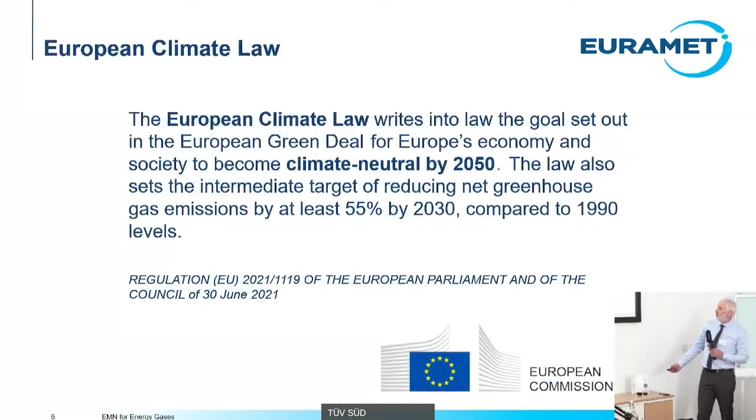Okay, so you'll all be familiar with statements like these. This is the European climate law, which puts into law their targets for carbon emission reduction to be climate neutral by 2050, and that's pretty much in line with where the UK is aiming for as well.

So the question then becomes, how can metrology support this energy transition? There's a lot of challenges. Chris mentioned some of them there, looking at reliable measurement to deal with these new gases within transport, distribution, storage, etc. So there's a coordinated effort across Europe to try and meet the needs of the stakeholders and look at the best ways to deal with those metrological issues and move them on into standardisation.

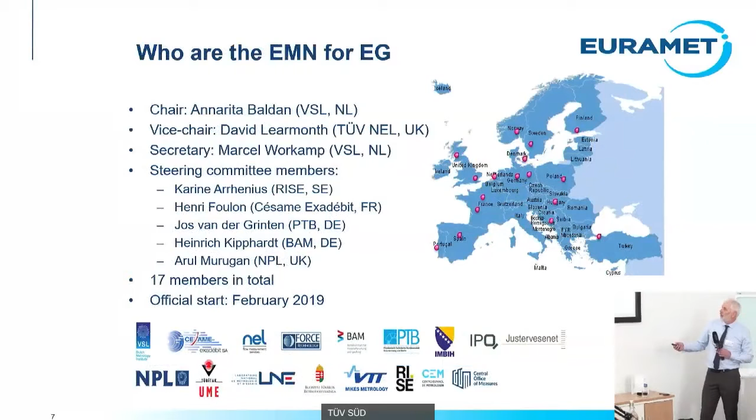Okay, so who are the EMN for Energy Gases? Well, it's a network of NMIs across Europe, and you can see we've got good coverage in all the main countries across Europe. It says 17 members there, but we've just taken on board another member, the Italian INRIM, the Italian Metrology Institute has joined us as well. So we're well represented with all the NMIs across Europe.

So what is the scope? It's really becoming a centre for energy gases. It's funded through EURAMET, which is a European Metrology Institute organisation, with a focus on energy gases, renewable gases, and also looking at measurement services across Europe for gas flow, gas composition, temperature, density, etc.

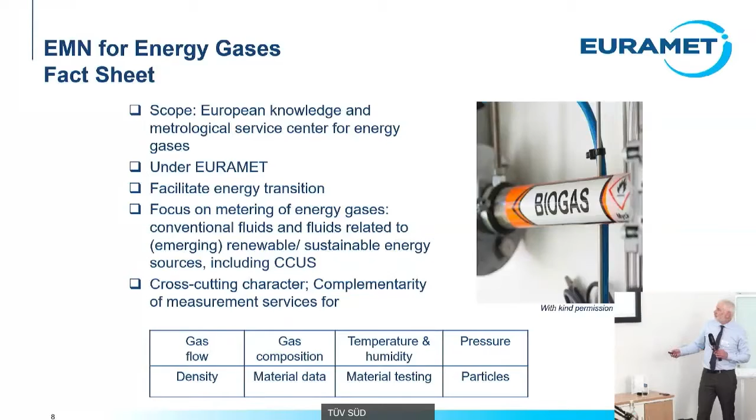Okay, so the EMN for energy gases started in 2019. We've had a few milestones since then. We've had a number of workshops, engaging with stakeholders to understand what their requirements are. We engage with the European Parliament to feed back to them where the gaps in metrology are and the gaps in standardisation. And we've just recently launched a website. Just to say about the website, if you wanted to find out a bit more, there's information about the different gases and the different projects that are happening across Europe within these areas. There's information, there's a newsletter, and there's information about workshops, etc., if people want to get involved.

So for our objectives, we're looking to engage with stakeholders and disseminate information from the various European research projects. There's a few here which the colleague might mention in their discussion. So there's things like decarbonising the gas grid, working on hydrogen vehicles, work on biogas, biomethane, and also some work on natural gas to try and make it more environmentally friendly.

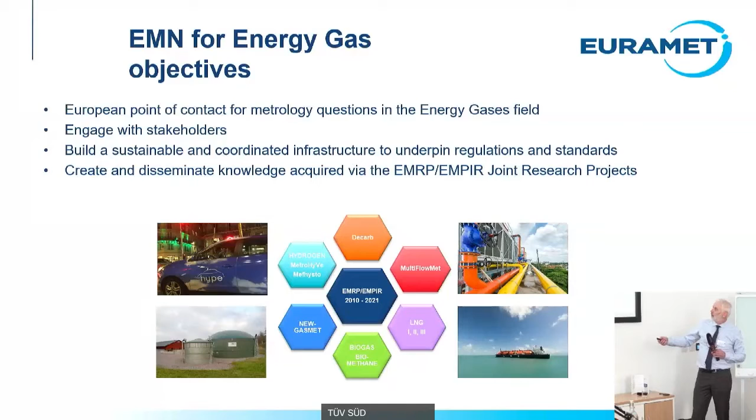So we've also developed a strategic research agenda. EURAMET had asked us to develop a strategic research agenda to help direct and focus any research that they're funding. So we were instrumental in putting that document together, and I think it's just recently been updated, but if anyone wants to see it, there's a copy on the website. You can download a copy on the website.

And also we're looking to maximise the impact of the research, so you can find out the outputs from the research. Again, the website's probably the best place to get that information.

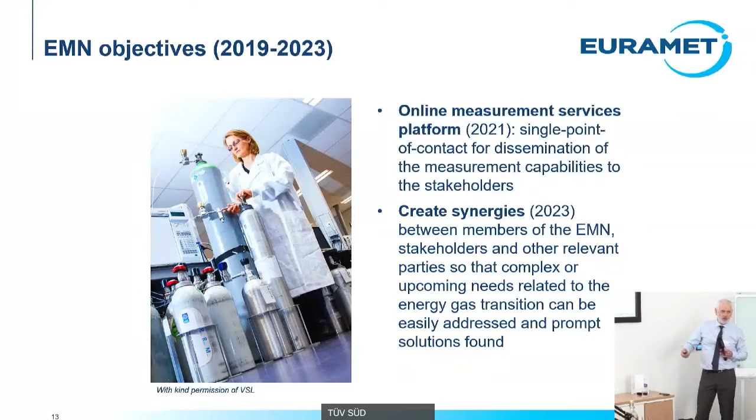We're also developing an online measurement services platform, since not every country has all the facilities required to carry out the necessary research. There'll be an online platform coming at the end of this year to let everyone know what the various NMIs have by way of services and test facilities, to bring closer working between the various NMIs across Europe and have a joined up approach to research.

So that's really about it. If you want to find out more, if you want to get involved in shaping future research on energy gases, if you want to find out where services across Europe might be available, have a look at the website - hopefully you'll find what you're looking for there - or you can email direct to our chair.

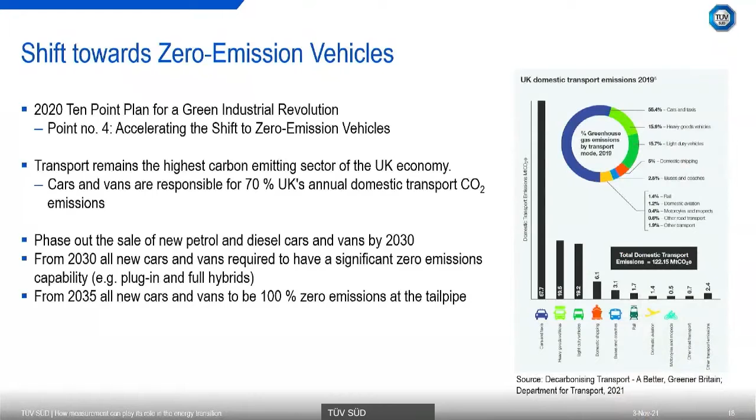So the government is looking at passing a mandate soon, which looks at phasing out the sale of new petrol and diesel cars and vans by 2030, followed by, from 2030 onwards, cars and vans having significantly zero emission capability, and by 2035 onwards, all cars and vans to be 100% zero emissions at the tailpipe.

There are two ways of achieving this: one is to use battery-powered electric vehicles, and the other is to have hydrogen-powered fuel cell electric vehicles, both of which produce zero harmful emissions at the tailpipe.

The problem is that there are certain circumstances where battery-powered electric vehicles are not suitable, due to, for example, the limited range of the vehicle, as well as the significantly long charging times for battery electric vehicles.

This is where fuel cell electric vehicles can play a key role, because filling up a car with hydrogen is similar to filling up a car with petrol or diesel. Within 5 minutes, you can fill up a car with hydrogen and have about 400 miles of range.

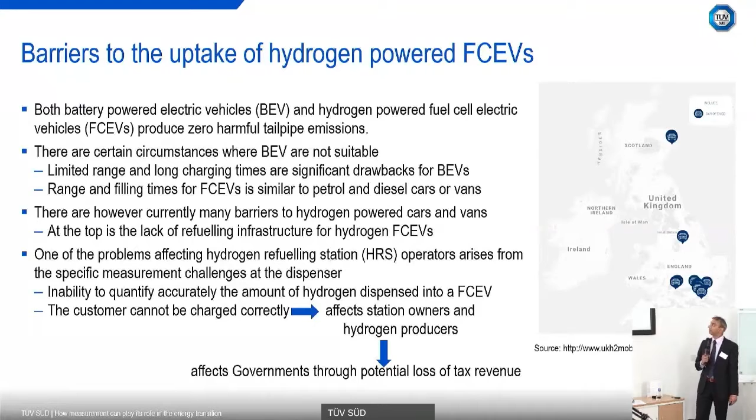However, as Sonia mentioned, James May showed in his YouTube video that he's got the latest Toyota Mirai car, which has a good range, but there is a big limiting factor: the UK, as shown on this slide, does not have a refilling infrastructure for hydrogen refilling stations.

Part of that is due to the significant barriers that are in place for dispensers to be installed. One of the barriers is that it's not possible to accurately measure or quantify to a sufficient degree of accuracy the amount of hydrogen that is dispensed from the refueling station. If you can't quantify the amount of hydrogen dispensed, then the customer can't be charged correctly, which has a knock-on effect on the station owners, the hydrogen producers, and ultimately the UK government, because the government can't charge the correct amount of tax.

This image shows that the UK at the moment has less than a dozen refueling stations for cars. You've got 2 in Aberdeen, and that's all you've got in Scotland, for example.

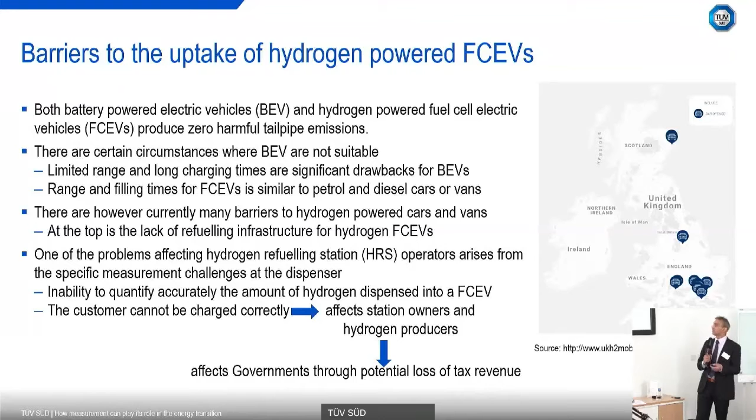There's been a lot of research into how to safely refuel a hydrogen fuel cell electric vehicle. Most of the systems in place for refueling stations are based on either SAE standards, CSA, or ISO standards.

Hydrogen is stored on board the fuel cell electric vehicle in what's called a compressed hydrogen storage system, where you've got hydrogen tanks, the required tubing, on-tank valves, and so on, which ensures a safe system for storing hydrogen.

One concern when filling up the car with hydrogen is the heat of compression effect, which causes the tank temperature to increase, and there are systems in place which minimize that. Hydrogen refilling dispensers follow what's called the SAE J2601 protocol, which minimizes the tank temperature so that it's below the maximum temperature limit.

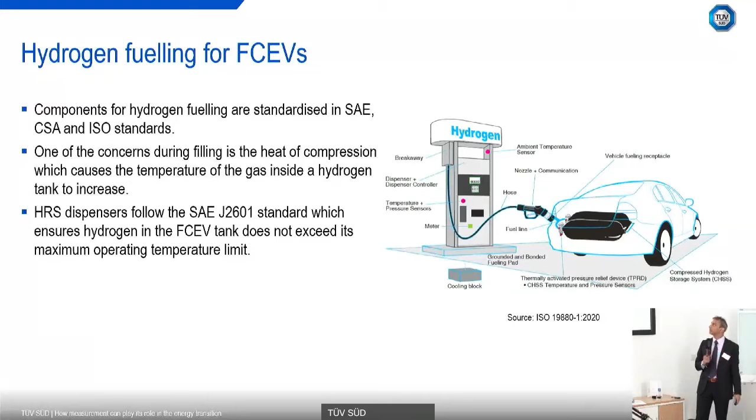The accuracy for the dispensers that dispense hydrogen is specified according to the OIML R139 standard. Based on this standard, the maximum permissible error is 1.5% for the measuring system, that is the flow meter, and for the complete system it is up to 2%.

The problem is that it's quite difficult to achieve these targets because the hydrogen supplied can vary significantly in pressure up to about 875 bar. Also, because you want to minimize the temperature increase in the tank while pumping up to 700 bar, hydrogen needs to be pre-cooled to minus 40 degrees C.

Based on these large varying conditions in terms of pressure and temperature, Coriolis meters have become the preferred choice for dispensers. There are two common locations: one is upstream of the pre-cooler, and the other is downstream of the pre-cooler, in the dispenser itself. There are advantages and disadvantages to each. Installing the flow meter upstream of the pre-cooler means you are measuring hydrogen at near ambient temperature.

Okay, so it's quite good for the Coriolis flow meter. However, because you've got a large dead volume downstream of the flow meter, you have measured that amount of hydrogen, but that amount hasn't actually been delivered to the car. So you have uncertainties in the flow measurement itself, or rather in the amount dispensed to the car.

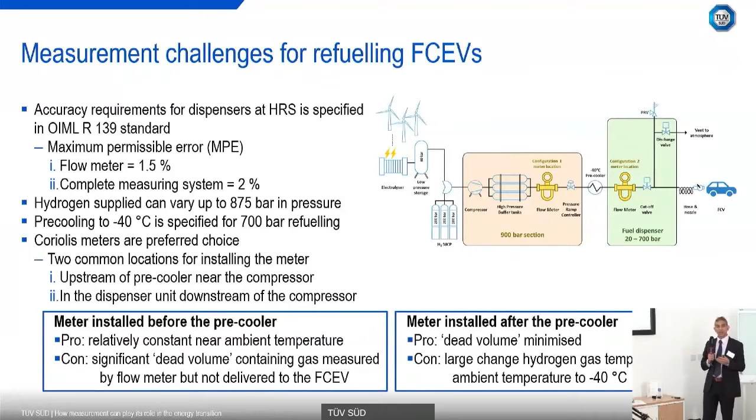So one way of overcoming that is to install the flow meter downstream of the pre-cooler, where you're minimizing the dead volume. The only issue with this is that the flow meter initially sees hydrogen at ambient temperature, and then the temperature drops significantly to minus 40 degrees C. This large change in temperature can affect the flow meter's accuracy.

So based on these questions, EMPIR project MetroHyVe 1 was started to look at addressing some of these questions. And what has happened recently is that we've just begun the MetroHyVe 2 project earlier this year, which looks at the learnings from MetroHyVe 1 and continues to help solve some of these issues.

So one of the aims of the MetroHyVe 2 project is to develop a metrologically traceable framework for testing hydrogen dispensers. As part of this, the different measurement institutes taking part in this project are looking at having intercomparison tests, where all the institutes take their field test standards to a single refueling station and carry out an intercomparison test.

So TÜV SÜD National Engineering Laboratory is participating in this MetroHyVe 2 project, and the funding for building the hydrogen field test standard was provided by BEIS.

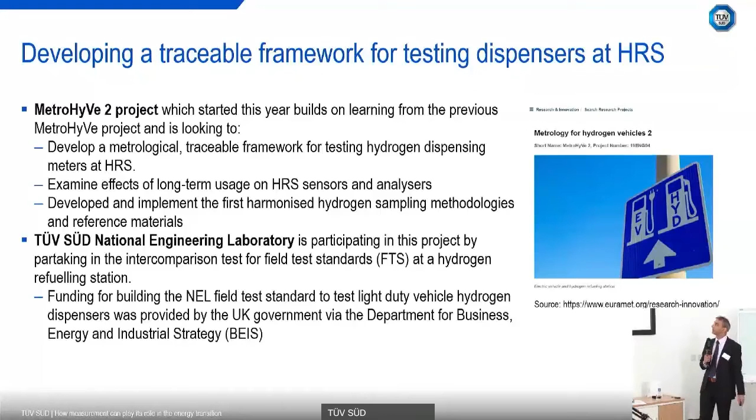Right, we shall look at now how we've gone about designing and building the NEL hydrogen field test standard for light-duty vehicles. The design basis for this field test standard was that it needs to be suitable to accurately measure the amount of hydrogen dispensed from the refueling station with respect to the OIML R139 requirements.

So the field test standard that we have built is based on the experience other NMIs have gained during the construction and testing of their field test standards. It is a gravimetric system that we have built, and it has a hydrogen capacity similar to a fuel cell electric vehicle.

So basically, we can fill the hydrogen field test standard using H70 dispensers and fill it up to 700 bar, according to the SAE J2601 protocol. The mass of hydrogen collected is around 4 to 6 kilograms, and the uncertainty of this measurement is about 0.3% at 95% confidence.

Now, as you may know, hydrogen has some concerns with regards to safety. So because of that, we've done a number of safety studies to make sure the system is safe to use. The first was to conduct a hazard and operability study at the design phase. Then we went on to look at the hazard area classification study and an explosion protection document to make sure the system was safe to use.

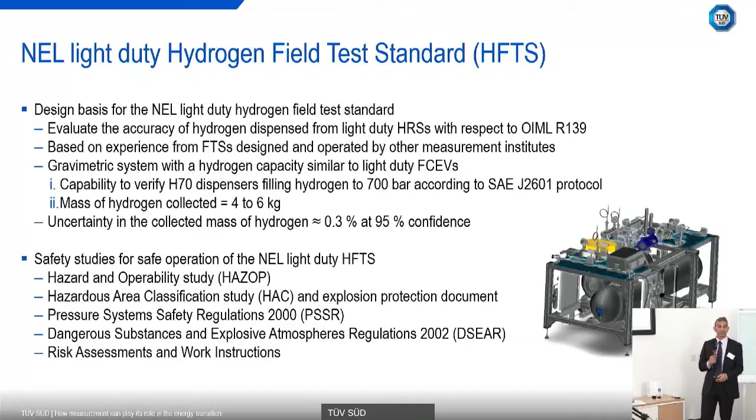Now, because we're dealing with a system up to 700 bar in pressure, we have to also meet the requirements set by the pressure system safety regulations. Since hydrogen is a flammable gas, we've also got to meet the requirements set by the DSEAR regulations. In addition, we've undertaken risk assessment and prepared work instructions on how to operate the test rig.

So how we would carry out the test is that the field test standard is transported in the rear of a van to a hydrogen refueling station. The van parks next to the dispenser, similar to what you would do if a fuel cell electric vehicle parks for refueling, and you connect the dispenser straight onto the field test standard.

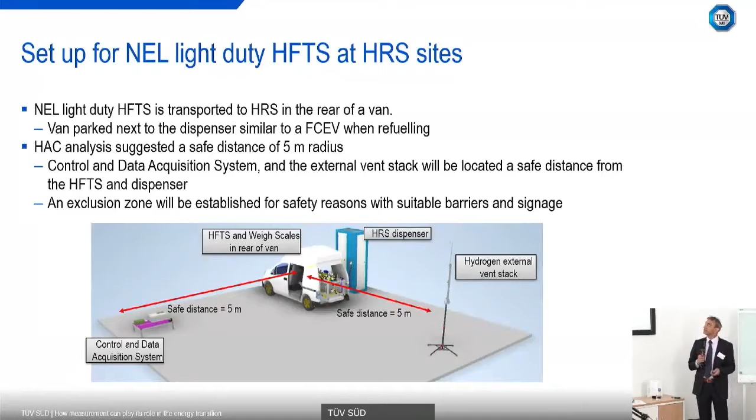The hazard area classification study had shown that you need a 5-meter safe distance for any piece of kit that is not ATEX certified, such as the vent stack, which will be 5 meters away from the field test standard. We are also looking at establishing an exclusion zone for safety reasons with suitable barriers and signage.

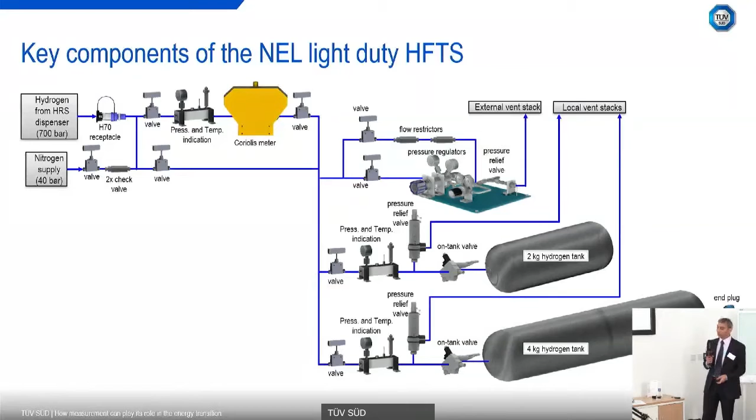As I mentioned previously, the light-duty hydrogen field test standard is a gravimetric system. The reason why we have gone with gravimetric is that what you've got to bear in mind is that when you fill a car with petrol or diesel, you're measuring the amount of fuel dispensed in liters. Hydrogen being a gas, you need to use kilograms instead.

So we are going to compare the kilograms of hydrogen that's dispensed as indicated by the dispenser against what we measured by the field test standard, which as I mentioned, is looking at the difference in mass before and after filling.

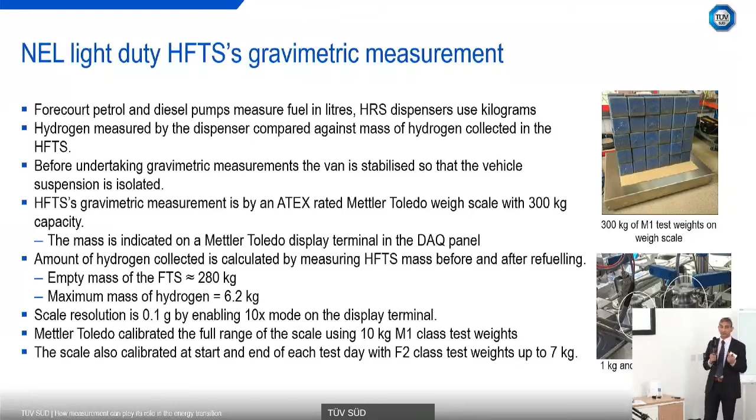The scale resolution has been enabled by using 10x mode, giving you a 0.1 gram resolution on the scale. Mettler Toledo calibrated our scale for its maximum 300 kilogram span using 10 kilogram M1 class weights. We also calibrate the scale before testing at a refueling station by using F2 class weights up to 7 kilograms, covering the full span we're going to be using in terms of filling the tanks with 6.2 kilograms of hydrogen.

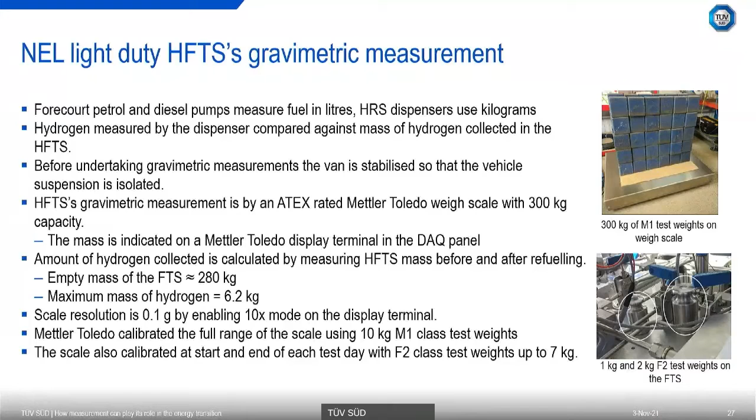Now what you've got to bear in mind is that the hydrogen tanks we're using are the same tanks that are in a fuel cell electric vehicle, and those tanks are what's called a type 4 hydrogen tank. They can expand slightly because of the 700 bar pressure. So because you're using a gravimetric system, you've got to take into account the effect of buoyancy because the tanks are expanding slightly.

As a result, we've got ATEX rated temperature, humidity, and ambient pressure sensors that are able to measure the ambient conditions around the tanks, and thereby calculate the air density, which is used to make corrections for buoyancy. Also, what we've got is a nitrogen panel that is installed next to the field test standard, as shown on the bottom right image.

The reason for the nitrogen panel is that after you finish testing, you need to purge the tanks from hydrogen so that you've got basically less than 4% hydrogen in the tank. This is so it's safe to transport the field test standard back to our site, as well as you've got to maintain about 20 bar or more in the tanks, because the tank cycle life gets affected if the pressure decreases below 20 bar.

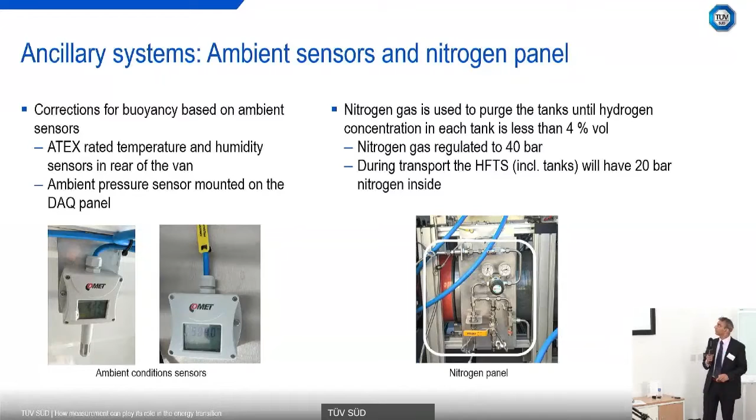We shall now look at the planned verification test for the gravimetric system.

So it's important that we verify the field test standard before it is taken to hydrogen refueling station sites. The setup we're going to use for this verification is basically similar to what other measurement institutes have done for their field test standards, and for this we are going to be using nitrogen gas.

The protocol for validating this refueling station field test standard is first to calibrate the Coriolis flow meter that you have on the field test standard. So you take it out, calibrate it at our NEL test facility, at the flow rates that you're hoping to use for the verification test.

Step 2 would be to install this Coriolis flow meter back on the field test standard, pass nitrogen gas at the flow rates you have decided based on the calibration, and compare the results from the flow meter against the mass calculated based on the gravimetric system. The verification test will be undertaken for the minimum measured quantity specified in the OIML R139 requirements, as well as pressures up to 40 bar, which is about 3.6 kilograms of nitrogen inside the tanks.

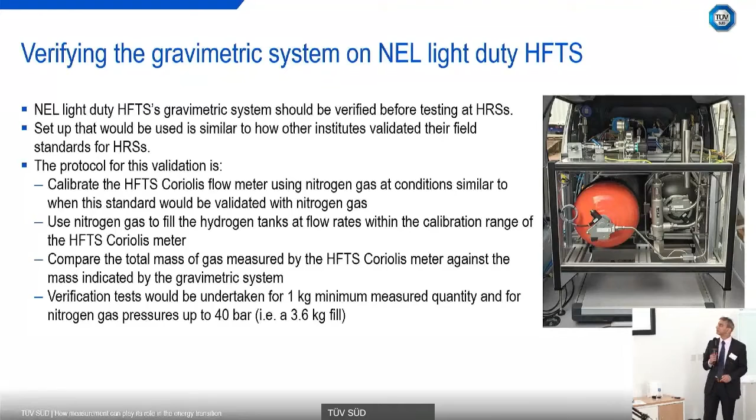So we've done the calibration of the Coriolis flow meter last summer, and this is the setup that was used. It is similar to the setup used previously in the MetroHyVe 1 project, where we looked at alternative methods for verifying Coriolis flow meters used in hydrogen refueling station dispensers.

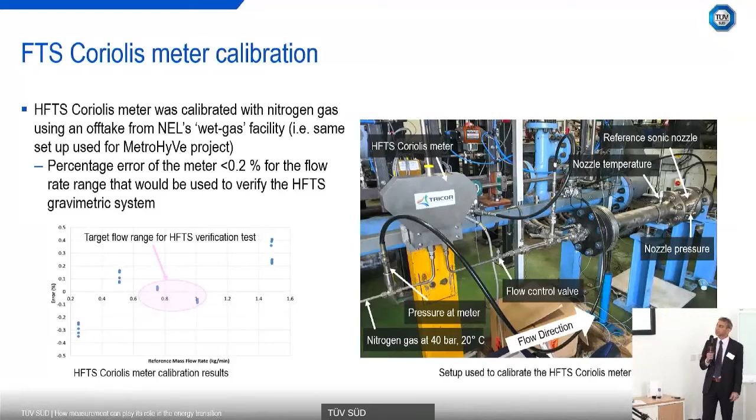What you're looking at is a setup that uses a NEL wet gas facility where we sent nitrogen gas at 40 bar through the flow meter at 20 degrees C and saw how the flow meter performed. As you can see on the bottom image, the graph shows that the field test standard Coriolis flow meter is very accurate, with a measurement uncertainty of less than 0.2% within the flow rate we're hoping to use for the verification test.

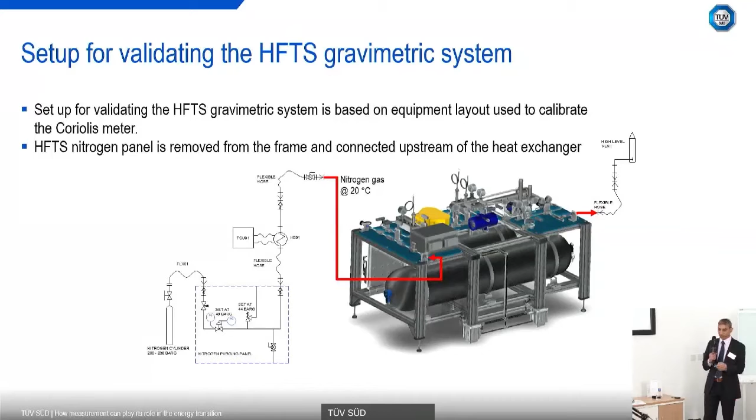The setup that would be used to validate the gravimetric system is similar to the setup used for calibrating the flow meter. Basically, we're going to be using nitrogen at up to 40 bar at 20 degrees C. To make sure we've got 20 degrees C nitrogen coming in, we have taken the nitrogen panel that was on the field test standard out and are hoping to install it upstream of the heat exchanger, thereby ensuring 20 degrees C nitrogen gas enters the Coriolis flow meter.

The final slide is going to look at some future work that we have planned for NEL in terms of hydrogen refilling stations.

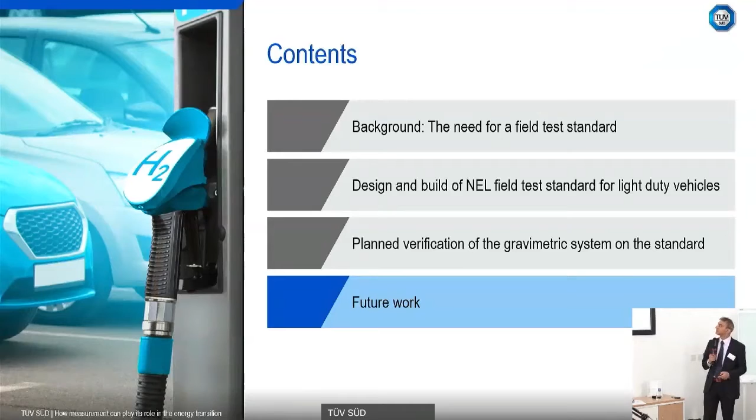The first one is the MetroHyVe 2 project, as I mentioned previously, whereby we're hoping to join up with the other project partners and verify each field test standard at a single refilling station, thereby obtaining intercomparison results so that we have additional traceability for the NEL hydrogen field test standard.

The next one is that NEL National Laboratory are looking at launching a joint industry project in early '22 to determine and verify the performance of hydrogen refilling station dispensers in the UK in relation to the OIML R139 requirements. Based on these tests, we're looking at compiling a best practice guide for the industry for verifying hydrogen refilling station dispensers.

As you might know, some councils in the UK are looking at heavy-duty hydrogen-powered vehicles for council use, and therefore there is a need for a heavy-duty field test standard as well, in addition to the light-duty one.

Based on this requirement, NEL is currently developing a field test standard suitable for heavy-duty vehicles. The design of that standard is based on the learnings gained while developing and building this light-duty field test standard. The total mass collected in the heavy-duty one will be 24 kilograms, and rather than 700 bar, the heavy-duty standard is essentially for 350 bar. The target measurement uncertainty is 0.5% at 95% confidence.

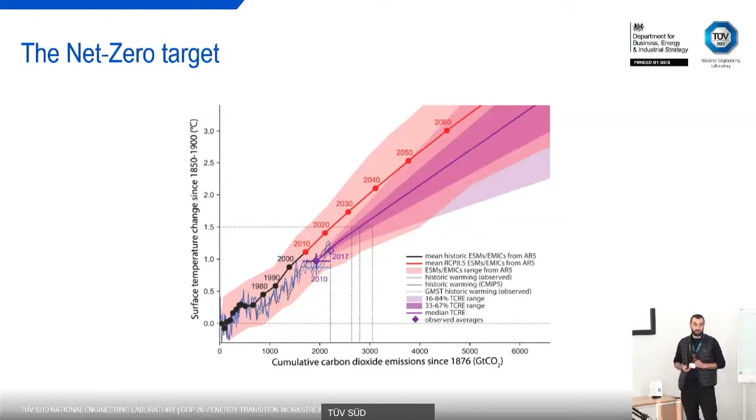So we need to put a cap on CO2 emission, and I'm trying to show the concept of net zero and what CCS is with a bit of an analogy.

So the cap is basically the level of your bathtub, and we are all sensible people. We generally don't overflow the bathtub, but I have twins at home, 2 years old, and they like to go around the house and make the best of it. One thing is they like to play with water, so they open the tap, and maybe I'm not aware of it.

And that's what happened, and it goes up and up. And at a certain point, you reach almost the point to overflow your bathtub. And that's generally the time when I came into the bathroom. What do you do at that point? You sensibly close the tap first. You don't want to overflow.

But there is another little problem. My wife always told me the bath is leaking, you need to repair it. She started telling me this a while ago, but I didn't do anything. Somebody will make something at some point, it's not my problem. So the bath is leaking, and then I have another problem.

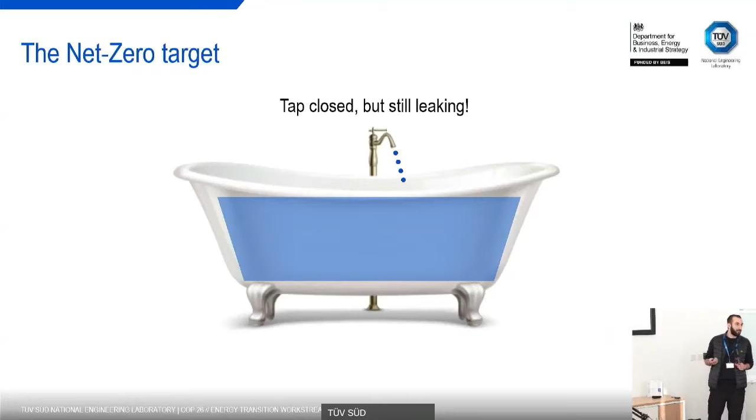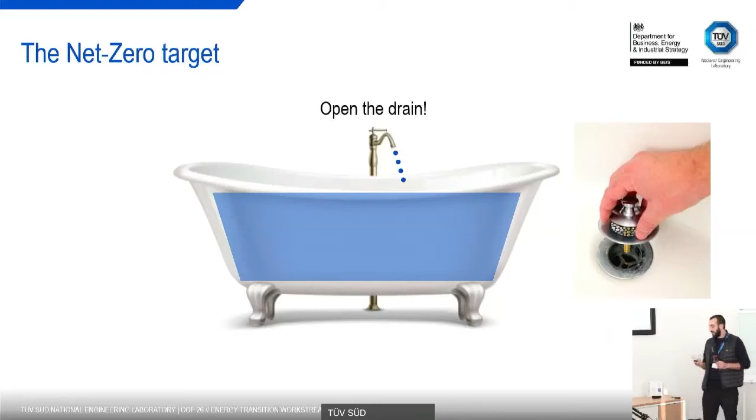It's still going to overflow. What am I going to do? The next sensible thing would be to open the drain as quickly as possible. So this is a bit of an analogy. I make a bit of entertainment here, but the subject is deadly serious. We are not really playing here, we are endangering our species in some way.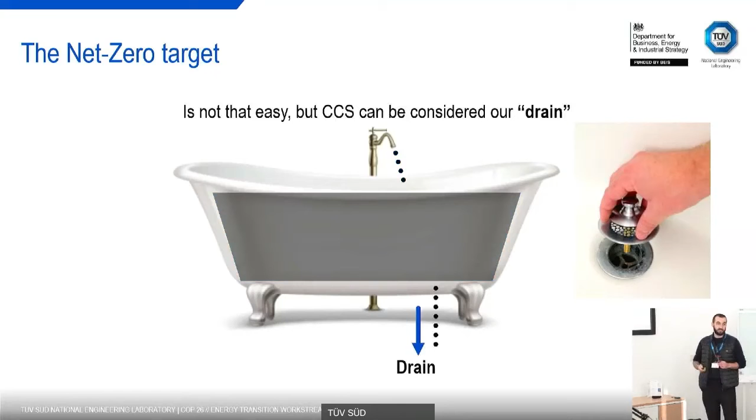But it's not that easy. CCS can be considered our drain, basically. That's the analogy, to tell the audience that CCS can be considered our drain in some way. And here is the net zero target and the net zero concept. So when people ask me what is CCS, I generally say CCS is the word 'net' in net zero. I'm trying to show this here.

So if you have zero emission, it means you don't have any flow from your tap. That's fine, that's the best case scenario. Still, you have your bathtub full of CO2, right? But when you approach net zero, it means your tap is still leaking, but you are draining the same amount of flow. So overall, this is net zero - the mass balance is zero, but you're still emitting something here. And that's probably our case at the minute.

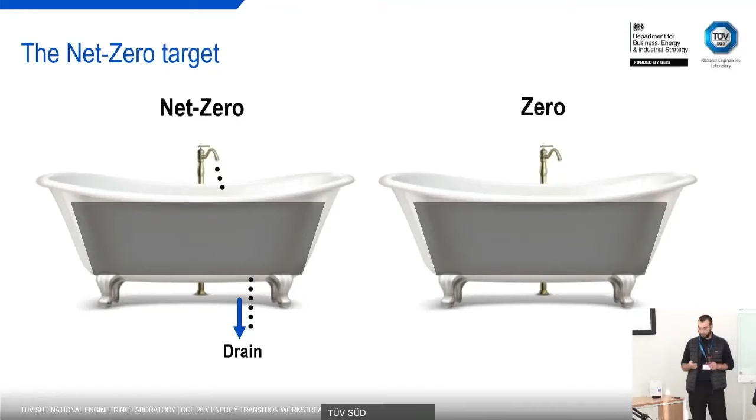So the net zero target, that's what it is. There are some countries around the world committing to the net zero target by around mid-century. UK is one of them, and it's actually in the law - we are committing to net zero by 2050.

So what is the role of CCS in reaching net zero? We have several sources that speak about the importance of CCS - I just put 3 of them here, but you can find many more in the literature. The Climate Change Committee says CCS is a necessity, not an option. Also the IPCC report envisages different scenarios to reach net zero, and in many of them, the majority, the contribution of CCS was very relevant.

And also we have the International Energy Agency that predicts, in their sustainable development scenario, 10.4 gigatons of CO2 captured from the energy sector by 2070. So that's not a trivial amount - that means we really need a lot of facilities.

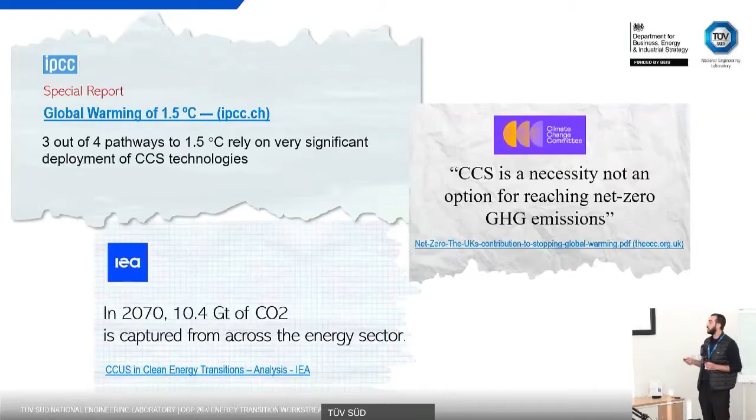What is the UK government strategy? Well, CCS plays quite a role in the UK government strategy to reach net zero. We recently had confirmation that 2 clusters have been selected for track 1, so they are in negotiation with the government to receive support from them. Also, CCS has an important building block in the hydrogen strategy, to have a rapid upscaling of low carbon hydrogen via steam methane reforming.

And also about policy, at the minute they are looking to develop a UK emission trading scheme.

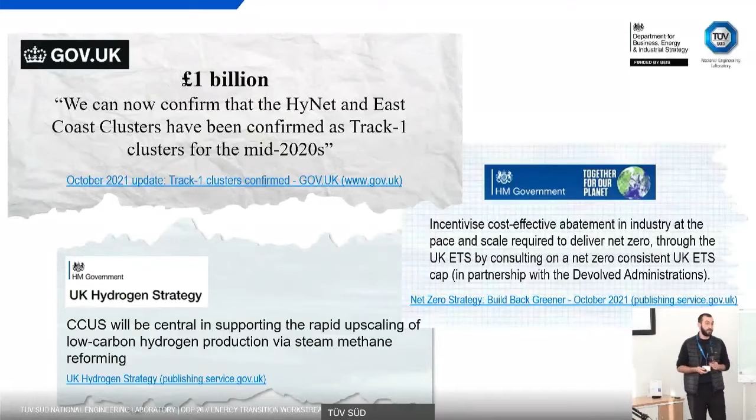So, that's nice. I spoke about net zero and CCS, but what is the role of flow measurement in all of this? Well, we will need to mobilize large investment here. It's a huge amount of investment, both from public sector and private. And to build this infrastructure, somebody is talking about a green revolution. So again, it's not a trivial effort from everybody here.

And when you start to mobilize money, you have financial transactions, you have goods transactions, and all these transactions are always underpinned by two things: quantity and quality. This goes back centuries. It doesn't really matter much what you are exchanging, it can be tomatoes or gold. Of course it changes the uncertainty, the accuracy that you need, but still you are always looking for quantity and quality.

And again, I go back to my babies. They really like banana, and they already can say if I gave them 2 bananas or 3 bananas. So we instinctively can recognize the quantity of things. And also they can recognize the quality, because when I give them the darker one, they generally don't want that. So for them, that's not good quality.

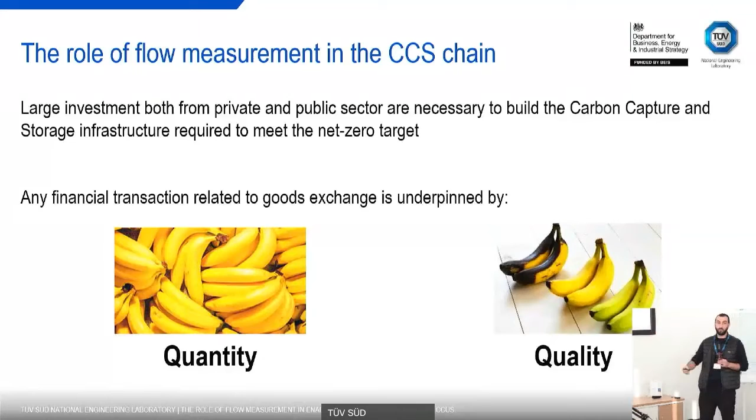Now, what about flow measurement? Well, we are interested in quantity. So since we are dealing with fluid, we need to measure the flow. That's where flow measurement comes in. And also the quality.

So this is an example of the CCS chain you can have across the country. So you have the capture plant, the emitter, the storage, the ship loading, offloading. And I've tried to show the possible meter locations, you see here with the M in the purple circle. So these are all meters that can possibly be installed to measure the amount of flow going in and out from all these facilities. And that's really a key piece of equipment.

And when we speak about measurement, we intend both the flow meter, but also the composition is a key element, the quality of what we are moving. And that's important for payment between parties, process monitoring and control, and ensuring compliance. It's also very relevant for payout of incentives from the government. You need to have something like this that shows what you are capturing or what you are storing.

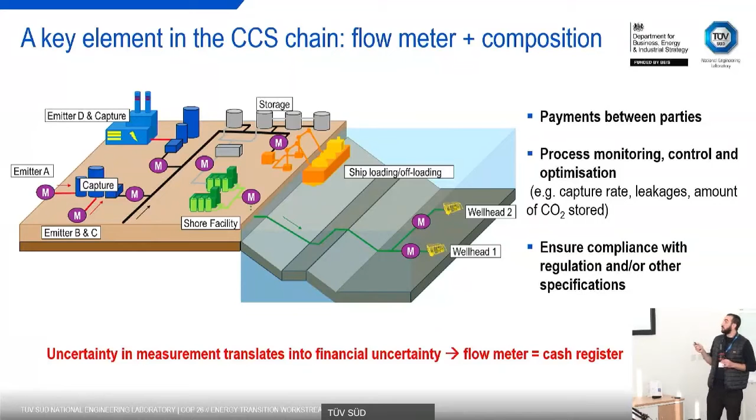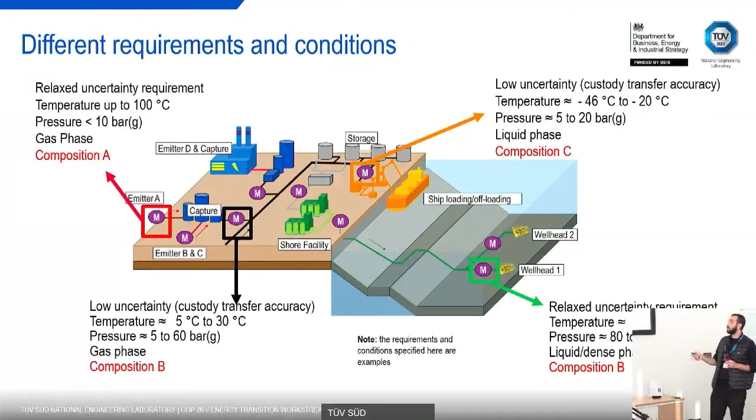So how do we verify these meters? Well, that's really the tricky point, and that's where NEL comes in. In particular, it should be noted that you don't have the same conditions at all these points. That would make our life easier if we had the same conditions around. But you may have something at high pressure, high temperature, something at low pressure, low temperature. It really depends on your project.

And another important consideration is composition. That's of paramount importance. And again, at the minute, the composition of your stream is really project dependent. So there's not really a standard across the industry that says these are your composition requirements. So this is one challenge that we need to address.

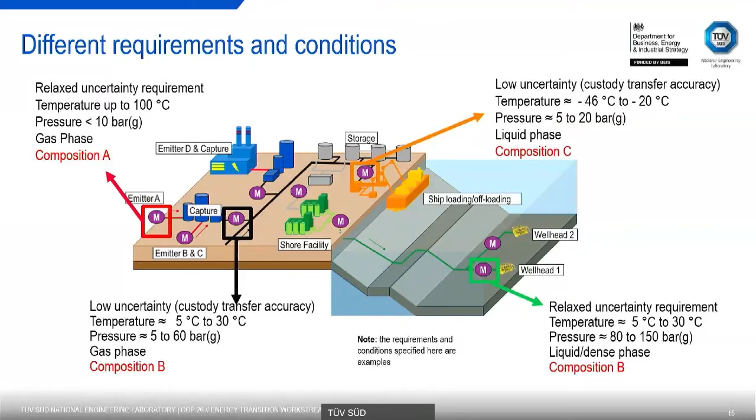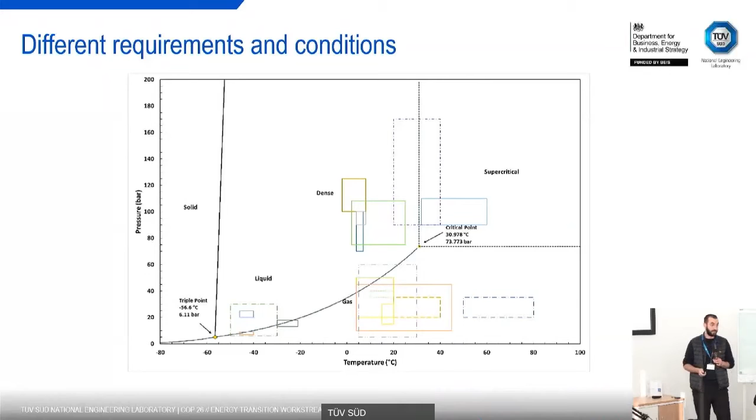I've plotted here a visual representation of pressure on the y-axis, temperature on the x-axis. These are the operating envelopes of some of the projects out there. You can see we have 3 major regions: the gas region, the liquid region at low pressure low temperature, and the liquid region at high pressure, which is dense phase. Some projects are also looking to go to supercritical phase. So this tells us something, because we have liquid, dense phase, gaseous phase, and potentially supercritical, and the meter should work with this condition, this condition, this condition, and this condition.

That means we need to validate the meter for each of these conditions. And that's our challenge.

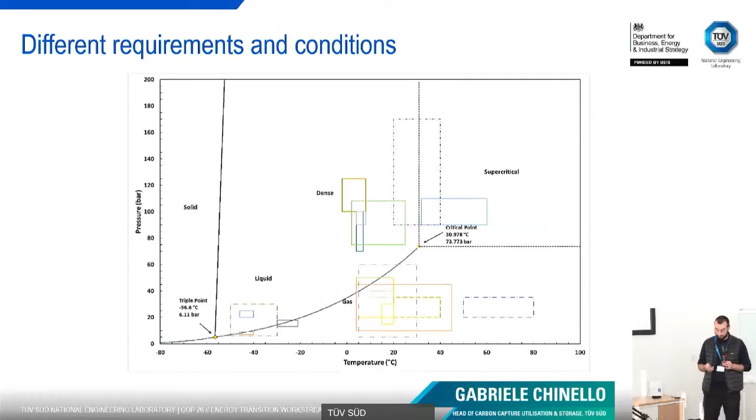At the minute, there is a huge gap in traceability. It means that we cannot really validate and calibrate the meters that you are going to install, because we are lacking the calibration loop, we are lacking the traceability necessary to do that. And traceability is a key element, because it basically gives you certainty of your measurement. And that's what the business needs, and that's what we really need.

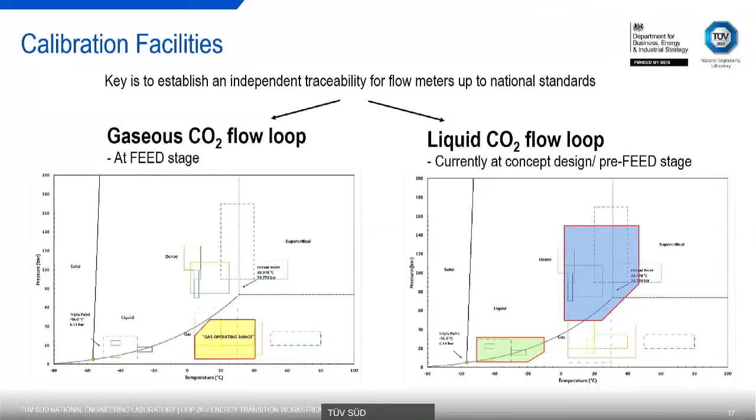So in order to fill this gap, we are actually looking at developing facilities at NEL to calibrate these meters. We are looking to split between gaseous and liquid flow loop, to have two different approaches. For the gaseous loop, we are trying to cover this range, particularly the gaseous range. For the liquid, we are trying to cover the two regions we are interested in: low pressure low temperature, and high pressure, medium to medium-high temperature. This is underway. The gaseous loop is a bit more advanced, but the liquid loop is very relevant too. So both of them, we are really looking forward to proceed with this project.

Also, we have a collaboration with Heriot-Watt University. Johnson is just sitting here, so if you are interested, he's the PhD student taking care of this project. This project is about flow measurement with different mixture compositions, and we are looking to test Coriolis and orifice meters here.

And it will be probably more dedicated to the dense phase and supercritical phase, but also to some extent the gaseous phase. And this is the flow loop.

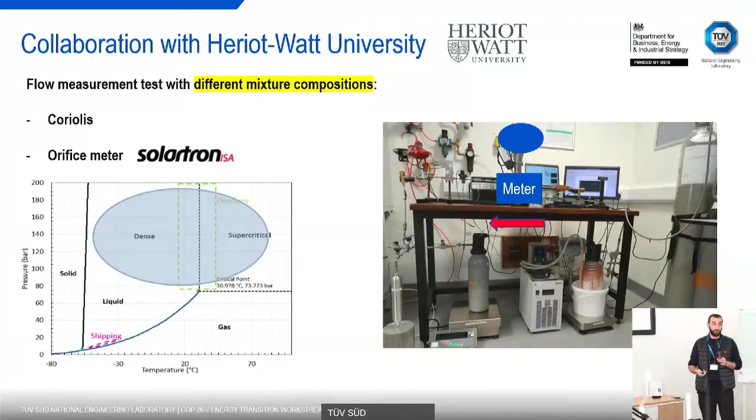It has a primary gravimetric standard, so we can test meters here with different compositions to assess their capabilities. We also plan to test this meter at NEL with different fluids like nitrogen or water, and also to investigate the transferability of calibration.

We are also part of a bigger project, a European one. This is called Metrology for Decarbonizing the Gas Grid, or DECARB. We have several working packages here, not only for measurement. There is also a working package about equation of state, composition measurement, and so on.

But NEL is mainly involved with working package one. We are the working package leader for that package. That's about flow measurement. This project is not only for CO2, it's also for hydrogen application and hydrogen methane blends.

We have several tasks in working package one. Task 1.1 is basically understanding the requirements of industry. That's pretty important key, because if we don't get right what the industry requirements are, you're not going to meet the demands, the requirements.

So we are really reaching a lot of stakeholders there, and I really appreciate if you want to engage with us on telling us your requirements, both from the manufacturing perspective or also from the operator's perspective.

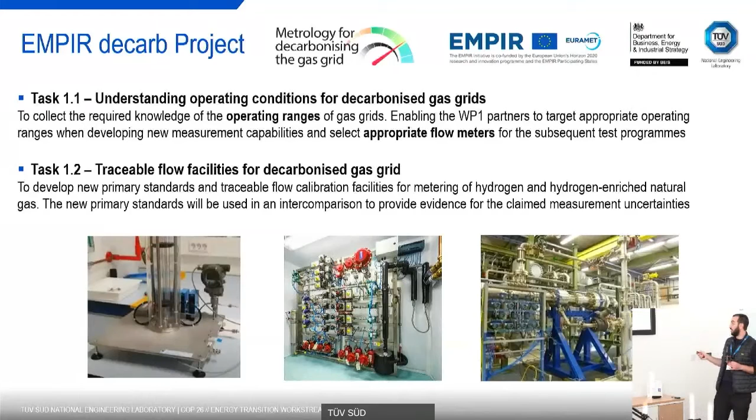Then we have task 1.2, development of traceable facilities. We have several partners taking care of that. Task 1.3, we will test meters with hydrogen and hydrogen blends and see their performance. And also task 1.4 is dedicated to CCS.

We will test flow meters, but with CO2, primarily with gaseous phase, but also some small tests with the liquid and dense phase.

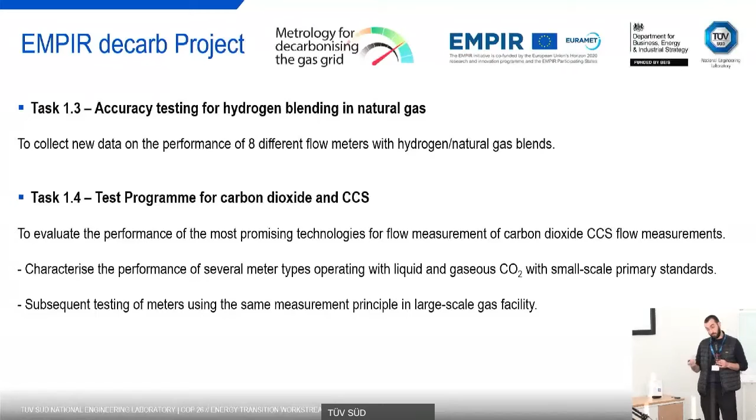So that's the European project currently underway. As David said, we also have another proposal going on with a lot of different partners involved, and we will know the results in a few months' time, but that will be specific to CO2.

So to end up, if you are interested to take part in the European project, you are really invited to take the survey on CCS. We really need your input. I think this is honestly a big challenge for all of us to decarbonize the gas grid and reach net zero. So we really need to come together for this challenge, and I'm pretty sure we will do that. So thank you for your time.

Yes, take a seat. And I'm sure we're going to have some questions. I'm going to ask a couple of online ones first, if that's all right. But do keep thinking if you've got some questions.

So, Gabriele, are other national measurement institutes currently active in CCUS? Have a drink of water first, of course. After all that was a fantastic presentation. No, great presentation.

Any other national measurement institutes currently active in CCUS? Well, at the minute, again, there is a bit of a gap there, honestly speaking. There are good intentions. There are different players trying to develop facilities, but especially on the liquid part, I would say there's not really a clear commitment and a clean investment decision.

So yeah, we really need to address that as soon as possible. Okay, with some urgency. Another question: is two-phase flow likely to occur at the metering point? Yeah, that's probably a good question. Whenever I spoke with the operators, they don't want to have two-phase flow. That's out of question, because it will really affect the performance of your meter. So they're really designed for single-phase flow.

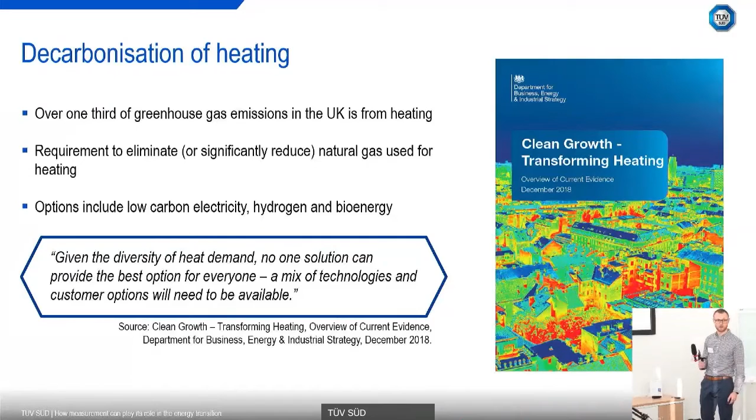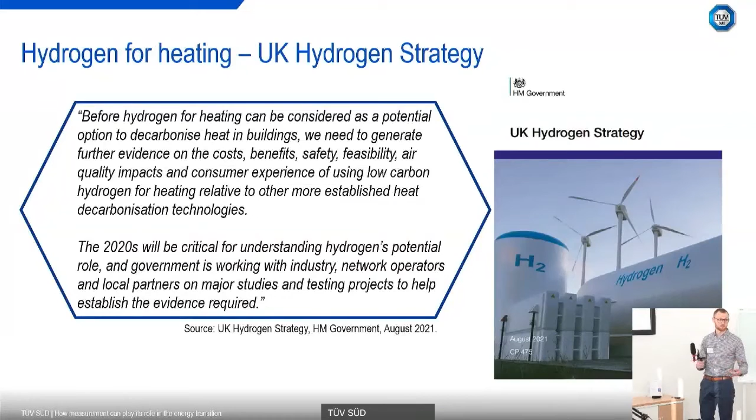I've taken a quote from the Clean Growth Transforming Heating paper by the Department for Business, Energy and Industrial Strategy. It says, given the diversity of heat demand, no one solution can provide the best option for everyone - a mix of technologies and customer options will need to be available. So it looks as if hydrogen is going to play some part - we don't know how big a part, but we recognise it's going to play some part. That's reaffirmed in the recently published hydrogen strategy by the government, which essentially says there's a lot of work to do to develop evidence on the costs, benefits, safety, and feasibility, and this decade will be particularly critical to understand hydrogen's role. There's a need for everyone to work together on studies, tests and projects to see whether hydrogen is a viable solution for heating.

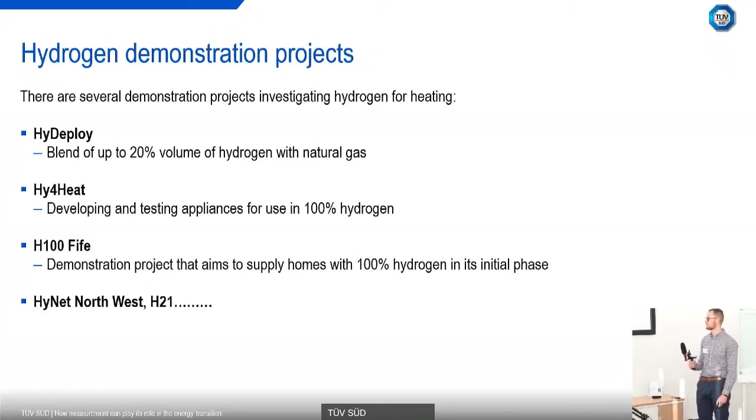Work is already underway in this area, with lots of demonstration projects popping up. There's the HyDeploy project, looking at blending up to 20% hydrogen into the gas grid. There's the Hy4Heat project looking at new appliances for 100% hydrogen. The H100 Fife project is going to be supplying several hundred homes, and even beyond that, with 100% hydrogen. Other projects include HyNet North West and H21 - this list is by no means exhaustive, but there is a lot of work going on to see whether using hydrogen in the gas grid is feasible.

That takes us on to the meters that sit outside everyone's homes. They currently meter natural gas - how do these perform in hydrogen or natural gas hydrogen blends? Is the accuracy affected? Or do we need to develop new meters to be used for hydrogen? In recognising this, BEIS funded us to build a hydrogen domestic gas metering test facility here in East Kilbride, to answer these questions essentially.

Now the design and operation of the facility. I've got a few slides on this. For those that are going on the tour, I'll go over it in more detail, and it will be nice to see it after this as well.

Before I go on and show further slides on the complexities of the facility, it's pretty simple in operation. It's an open flow loop. We have two separate lines to meter methane and nitrogen, and a line for hydrogen. We can operate with single gases, so we can measure pure methane or pure nitrogen. We can also measure pure hydrogen, and we can also measure blends of methane, nitrogen, and hydrogen.

We measure the reference flow rate separately for each of the gases. If we're testing a mixture, they will mix after we measure the reference flow rate, then pass through the test meter and out through the vent. We essentially compare the reference flow rate to what the meter outputs.

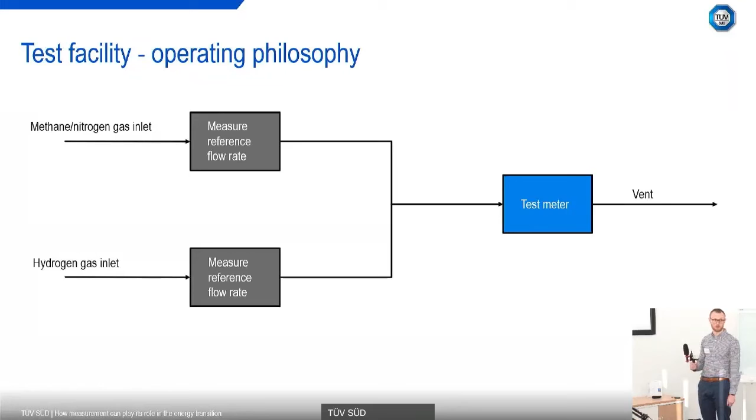For our reference flow rates, we use sonic nozzles for reference metering. These are relatively simple in construction, and by measuring upstream temperature and pressure, you can calculate the mass flow rate from the appropriate thermodynamic properties of the fluid. Provided they're calibrated against the appropriate primary standards, you can achieve very low measurement uncertainty with these - approximately 0.2% with air. You can get them in a wide range of sizes, meaning a wide range of flow rates. Our nozzles are calibrated in air, but the performance is consistent when operated in hydrogen, and we've seen that. We couldn't actually get nozzles small enough to reach the lower end of the domestic range.

So we purchased some laminar flow elements, and these are used for the lower hydrogen flow rates. These are similarly differential pressure devices, but they operate at laminar flow, and it's essentially a small bundle of tubes. These laminar flow elements were calibrated in hydrogen. So that's what's used for reference instrumentation.

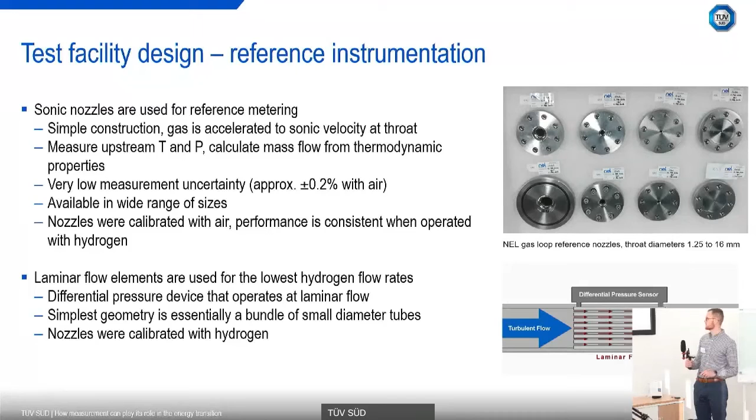So this is the facility in a bit more detail. We've got gas bottles of hydrogen and methane, and a supply of nitrogen from the James Young building. If we're measuring pure hydrogen, we've got gas bottles that sit outside at around 200 bar. We regulate down to about 16 bar in the cylinder store, and then the gas is fed into the facility.

We've got 4 control valves in parallel, and this allows us to set the inlet flow rate and pressure to the flow nozzles or laminar flow elements. We've got 3 flow nozzles in parallel and also 4 reference laminar flow elements, and we'll choose the one appropriate for the flow rate. It will then pass through the reference flow rate devices and subsequently through a heat exchanger, which can condition it down to -25 and up to 40 degrees C, through a static mixer, and then subsequently through the meter under test, and out through the vent.

The other side is similar for methane. Again, it's regulated down from 200 bar to around 16 bar. We've got inlet flow control valves which set the inlet pressure and flow rate, and we'll choose one of the 4 appropriate nozzles - different sized nozzles based on the flow rate we're testing at. They'll pass through there and then through the test section. If we're testing with mixed gases, these two gases will mix here, pass through the heat exchanger, through a static mixer, and then through the meter under test and out through the vent.

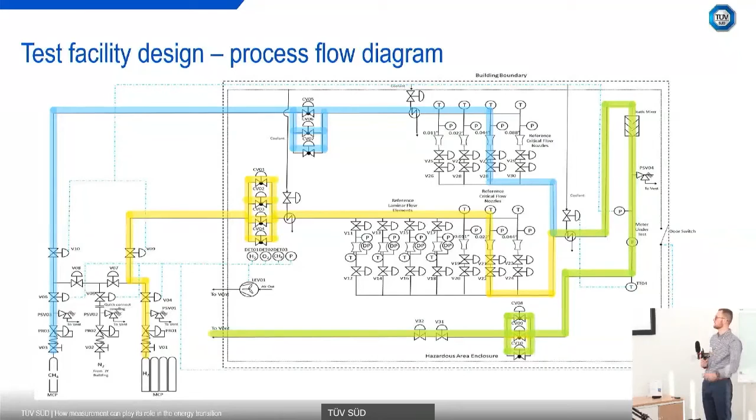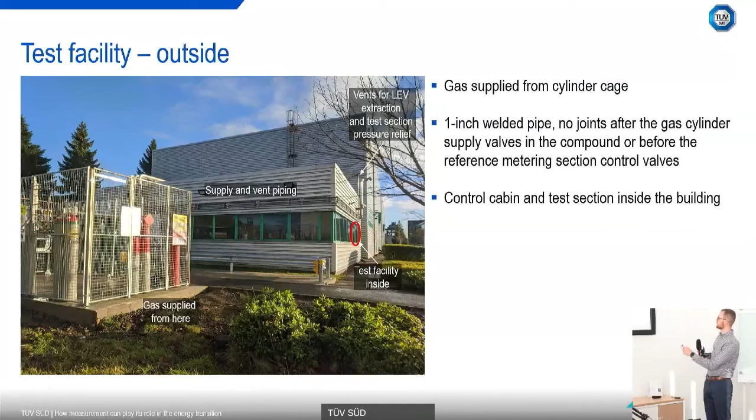Our gas is supplied from here on the left-hand side, in our cylinder cage. The gas is in the bottles here and it's regulated down. It's then fed along the side of the building, and our test facility sits inside. It's all welded pipe into the building to minimise leakage. The control cabin and test section of the facility are actually inside.

As we are operating with hydrogen and methane, flammable and explosive gases, we do have to take precautions. Everything in there is ATEX rated. We close off the gas supplies if we open the enclosure door. We've got an LEV extraction fan, and we also operate the rig at a slight negative pressure so that if gas is flowing one way, it will flow into the facility and we won't have any gas flowing out of it. We also have gas detection systems - if we detect too high levels of hydrogen, methane, or a low oxygen content, the gas supplies will automatically switch off.

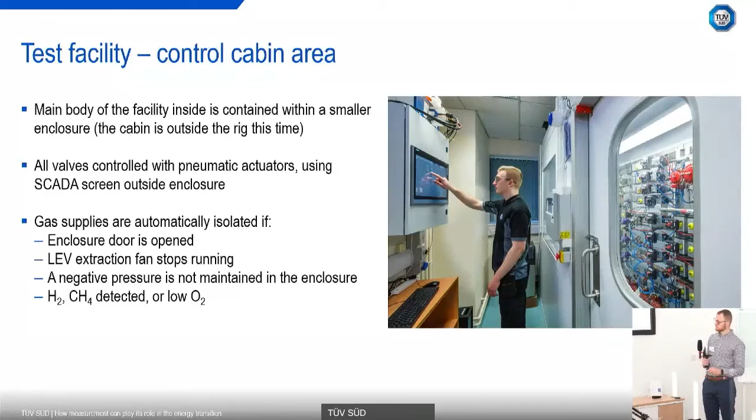We do envisage that the methane flow rate will increase. That's just due to Joule-Thomson effects and regulators actually freezing.

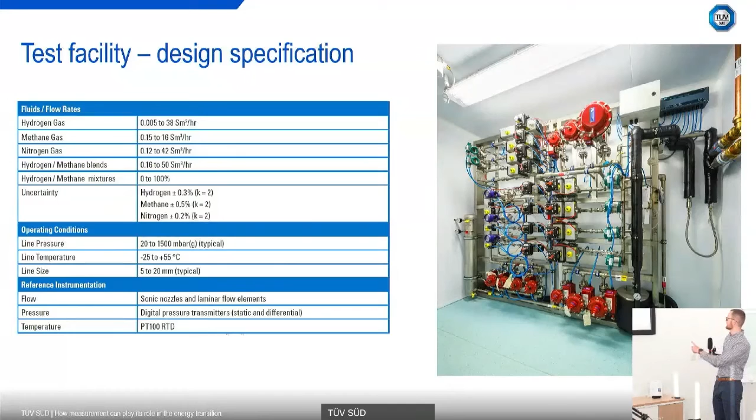So the facility, this is the main body of the facility on the right here. The gas enters, so from the cylinder store we've got our methane line and hydrogen lines here. And then it enters this coiled bath heat exchanger. It's just got water in it, just to bring it down closer to room conditions if it's cold in the winter.

So our hydrogen section is here on the left. The gas goes up, there's 4 control valves here. It takes a sharp left turn and then flows from left to right through one of the appropriate devices, so that's our 4 laminar flow elements and 3 nozzles. Valves will be opened next to these depending on which flow rate we're testing at.

The methane will exit here as well, but that will flow further along. It will flow up through the control valves, take a sharp right turn, flow up and flow through the appropriate critical flow nozzle. If we're operating with a mixed gas, both of these will be operating at once.

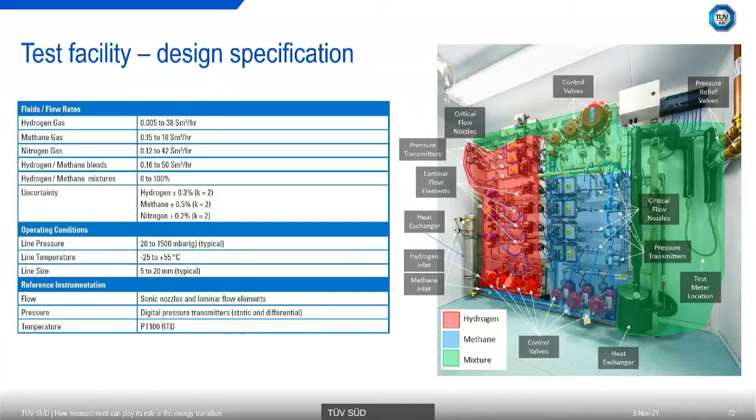The gas will mix in the middle, turn round, and go down through a heat exchanger, which is using heat exchanger fluid this time so we can control the temperature better through the insulated piping. And then we'll have the test meter here. We'll pass gas through the test meters after it goes through the reference section, and then out through the building and back to the cylinder store.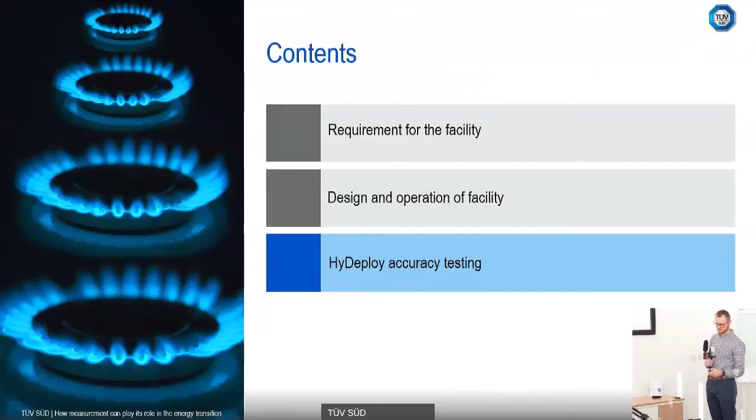So we did some testing with this facility. We did quite an extensive bit of testing for the HyDeploy project that I mentioned before in the slides before.

So a bit more on the HyDeploy project. This is a UK demonstration project looking to prove that blending up to 20% volume of hydrogen with natural gas is safe, and it's a greener alternative to using 100% natural gas. It's a project led by Cadent, but there's a consortium, so there's Progressive Energy, Northern Gas Networks, Keele University, the Health and Safety Executive and ITM Power, and government are providing extensive funding for this.

Essentially the main purpose of the project is providing evidence that existing pipeline components and domestic appliances can work with this 20% hydrogen blend.

So currently at the site, 100 homes and buildings are being supplied by the blend. No one's really noticed any disruption to service, and there's been positive feedback from students and university staff. It's allowed them to do durability testing on boilers and other appliances, and that phase of work finished in spring this year.

So they are looking at further phases of work on larger demonstration networks for public networks, northeast of England and the northwest. The reason for our involvement - they contacted us with respect to the gas meters.

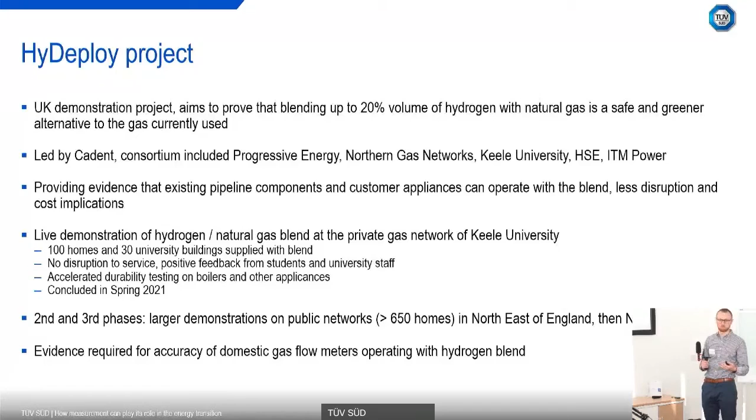So you want the consumers, both from a technical perspective but also from a consumer confidence perspective - they wanted consumers to know that actually they're getting what they pay for as the gas passes through the meter.

Understanding that, we developed a test matrix. So we tested 18 domestic gas meters, and we tested 11 diaphragm meters.

That's by far the most commonly used in the UK. These are just volumetric meters that essentially expand and contract as gas fills through them. We tested ultrasonic meters, 5 of them, and thermal mass meters. So the identifiers here refer to a particular model, and we tried to test at least 2 of every model.

We tested 6 of the 1 diaphragm meter model because we tested 2 new ones, and 2 that had been used to measure over 10,000 meters cubed of natural gas, and those that had used a blend over 10,000 meters cubed, just to see if we see any differences in the performance of them.

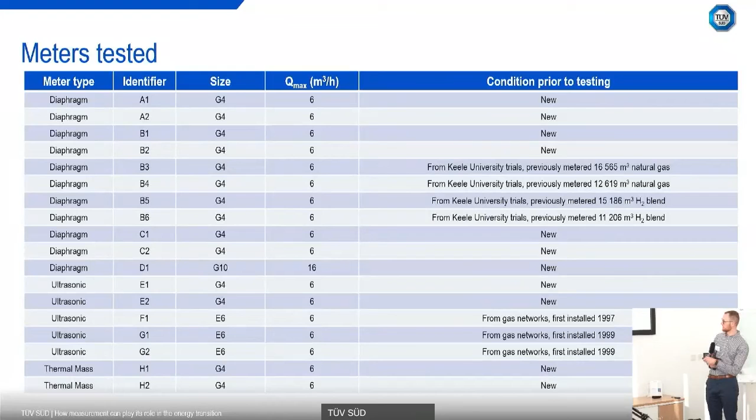Ultrasonic meters - we tested 2 new meters designed for hydrogen blends, but also those that have been in the gas networks for over 20 years, just to see what the performance looks like. We also included 2 new thermal mass meters in the programme. The point of this work was: if we pass natural gas through it, what do the results look like? If we pass a blend through it, what do the results look like? And what's the difference, and what do we think is going on? We did that for every meter.

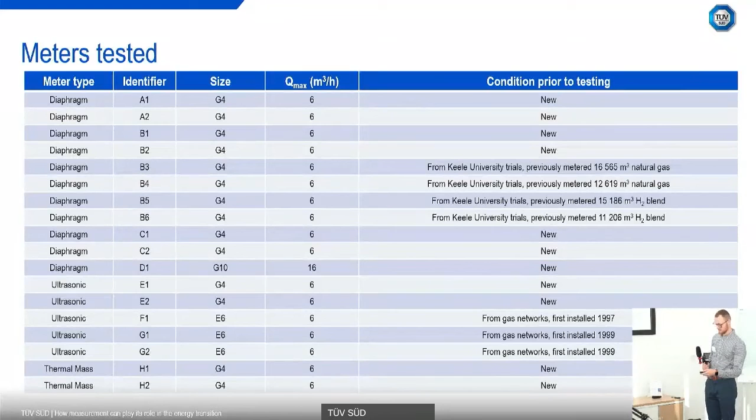We tested 10 G4 type diaphragm meters, which have a maximum flow rate of 6 meters cubed per hour. I've only included one graph here because the results were almost the same for every one we tested - they may have slightly different slopes to the error curve, some may be flatter. All of them performed within the MID accuracy class 1.5, the accuracy requirement for a meter to become Measuring Instruments Directive certified. All 10 G4 meters performed within there. More importantly, the results were on top of each other for every diaphragm meter we tested - there was no significant difference between the 100% methane and the 80-20% blend of the gases.

We tested 1 larger diaphragm meter, with a Qmax of 16 meters cubed per hour. It performed well, but didn't perform as great. It didn't meet the accuracy class requirements for the 80-20% blend, and separated a little bit more here, but generally the results were pretty close - less than 1%, significantly less than 1% difference between the blended gas and the 100% methane. Overall, the results for the diaphragm meters were pretty good, and confirmed that they are metering to a sufficient accuracy for the blends.

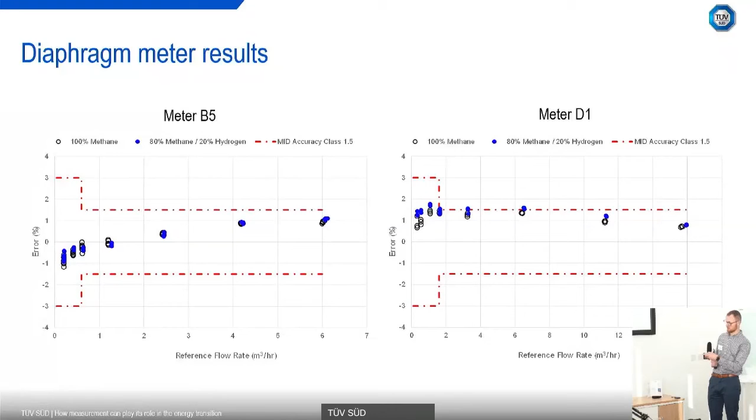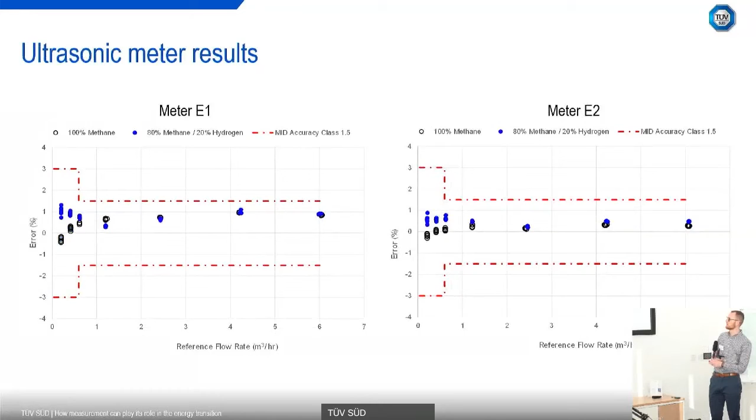We tested 2 new ultrasonic meters as well, and for the higher flow rates, they performed pretty well. All of the results are within the MID accuracy class limits, which is good. But we did see a bit of separation with them - these are more intrinsically complicated meters, with internal calculations, and probably because of fluid property calculations, you do see a bit of separation at the lower flow rates. But again, we were all within the accuracy class limits.

This was an older meter, installed in 1997, and we tested this with methane and the blend as well. It looks as though the meter has poorer repeatability, but the reason is we had no means of putting the meter into test mode and sampling from it. We had to take a video camera of the digital display, which only updated every few seconds, so it was difficult to determine when the number was changing. We could reduce this repeatability by taking very long test points, but we knew the repeatability issue was because of the sampling mode we selected.

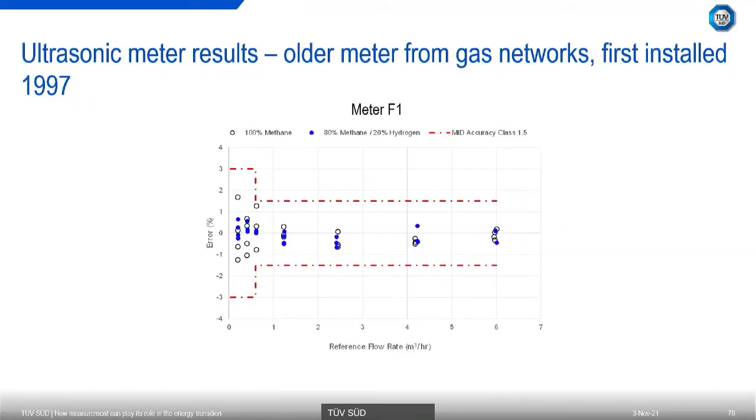Strangely though, the methane at the lower flow rates showed poorer repeatability, which can't be explained just by the test method, because the blend seemed to show good results. We are not sure why this is. Again, all errors were within the MID accuracy class limits, but we seem to have poorer repeatability for the methane for this meter - I'm not really too sure why that is.

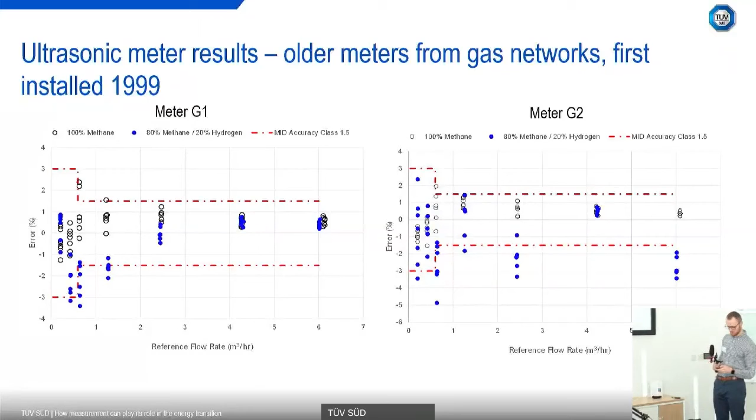So what we did is we decided to test with 15 and 10% hydrogen just to see what the results looked like. And they were more in line with the pure methane for meter G2. So we were wondering whether it may be that the fluid properties are almost just tipping over the meter at that point - they seem to work for pure methane, 10% and 15%, but when we get to 20%, the meter just reaches its tipping point, essentially.

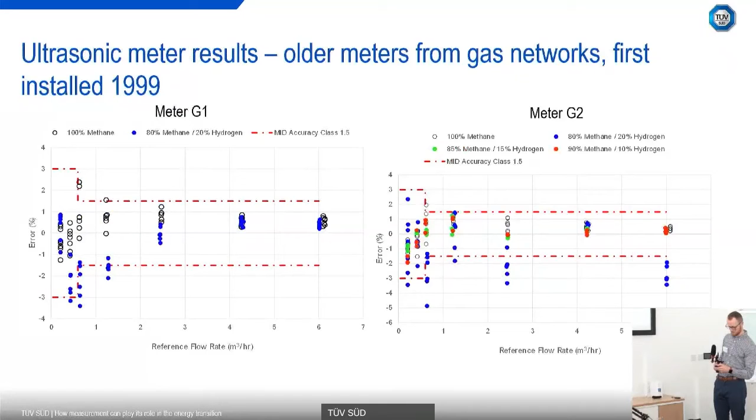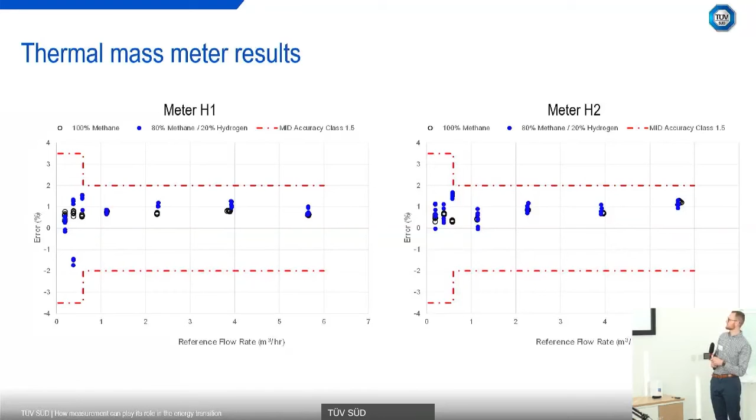Finally, I've included two thermal mass meter results. Again, these results agreed pretty well. We had poor repeatability for the blends, and also at lower flow rates there seemed to be a difference in results between some test points. The MID accuracy requirements require test points not to have a difference of more than 1% for the same flow rate, so this meter actually fails for a few flow rates because the errors exceed 1%. But at higher flow rates the results generally agree quite well, and it performs quite well apart from that.

So we tested a total of 18 gas meters: 11 diaphragm, 5 ultrasonic, and 2 thermal mass.

Diaphragm meter results were very good. They're the most simplistic technology, measuring the volume passing through it. So in a sense it was expected, but we were wondering whether introduction of hydrogen may cause increased leakages or anything like that, but it didn't seem to. The methane and blend results generally agreed within 0.3%. Only one meter, the larger B10 diaphragm meter, exceeded the class 1.5 maximum permissible error limits. Durability effects were not studied in detail, but two meters previously metered over 10,000 cubic meters of gas had errors consistent with other meters of the same model. To really assess durability we should use the same meter before and after testing, because these are different meters - a new meter and one that's been subjected to use - so we don't know what the shift is in performance.

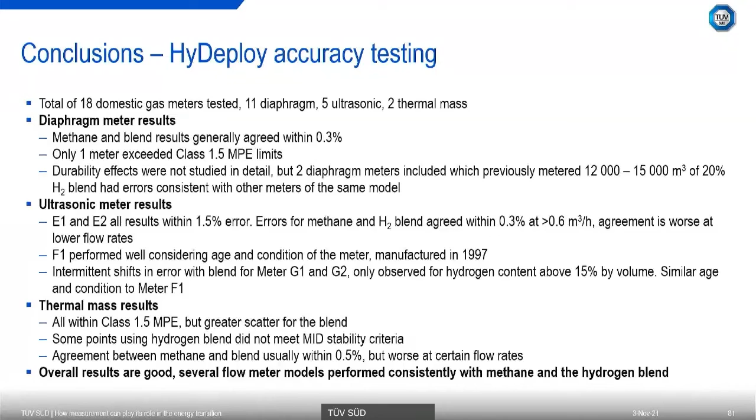For ultrasonic meters, the new meters' results were within 1.5 error, and the errors for methane and blend agreed at higher flow rates within 0.3%, but at lower flow rates we saw that separation. F1, the first of the older meters, installed in 1997, performed pretty well considering its age. We did see shifts in behaviour for G1 and G2, but when we tested with the 10 and 15% blend we didn't see this, so we're wondering whether this may be a function of the fluid property calculations, the internal calcs of the meter. But that was of similar aging condition to F1.

Thermal mass meters were all within the class 1.5 maximum permissible error. There was slightly greater scatter for the blend, and some points with the blend didn't meet the MID stability criteria - differences in errors of more than 1% at lower flow rates. There's usually agreement within about 0.5%, but at certain flow rates it was worse, with errors jumping down or up.

Overall the results are pretty good. Several flow meter models, particularly the diaphragm meters, perform consistently with the methane and hydrogen blend.

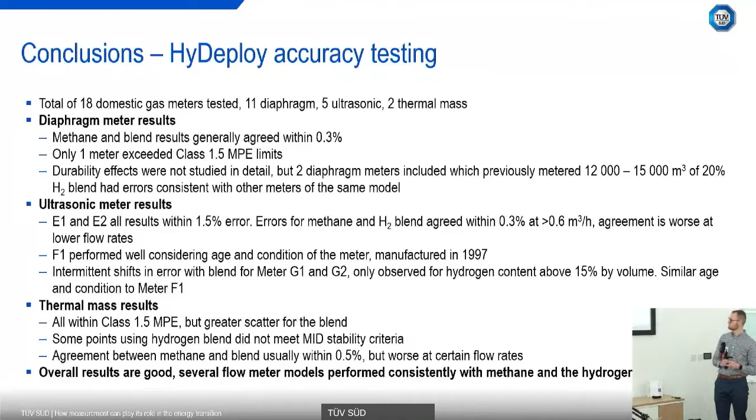That's great news. First question: are any other methane or hydrogen blends currently under investigation, and is 50-50% ever going to be an option? The HSE did a report back in the 90s saying up to 20% can be blended safely without any disruption, and all appliances installed in homes since 1996 can take up to 23% hydrogen. Any more than that, I think you need to start converting things. So it's minimal disruption up to 20%.

What is done for relative humidity measurements in the facility? We use pure bottled gas - relatively pure methane and hydrogen, research grade. That's why we use methane as opposed to natural gas in terms of impurities, because we need to calculate the thermodynamic properties for the reference flow rates pretty accurately.

That was the question, yeah, so yes, I think so. What sort of standards do you follow for reference critical flow or laminar flow measurements? There's the ISO standards, yes, for critical flow, but that's if they are manufactured to a specific tolerance - then you don't need to calibrate them. But ours have been manufactured and calibrated, and we have calculated the uncertainty, etc., from them.